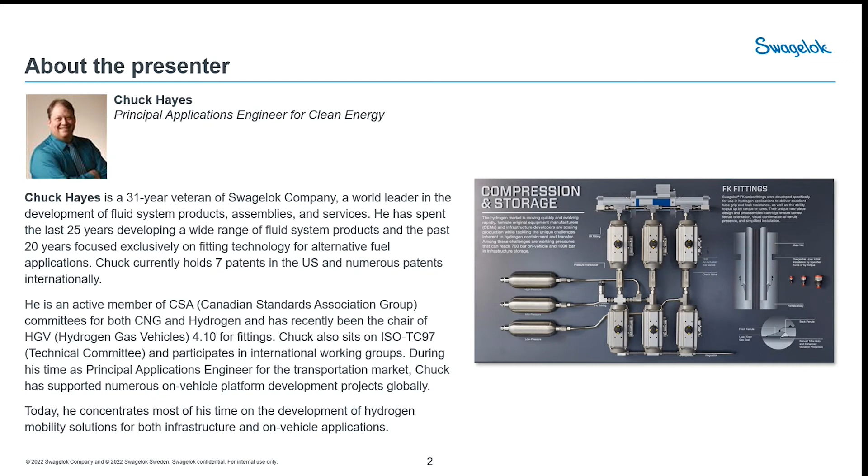Good morning. Well, good morning here in Cleveland, and good afternoon and good evening in other parts of the world. Welcome, and today we're going to be talking about some of the myths around hydrogen. We've tried to collect quite a few of them, and we're going to be talking about them and how these factors persist and the misinformation that's going out into the market.

A few of the areas we're going to look at: the safety of hydrogen, its viability as a mobility fuel, cost in both relative and real terms moving into the future, as well as its environmental impact. So today we'll be addressing each of these topics, to set the record straight on some of these different discussions, and why we believe hydrogen is the best path for the global economy moving forward, as well as a worldwide focus for helping us achieve a greener, more sustainable future, meeting the various governmental goals, including the Paris Accord and other requirements that are coming out throughout the world.

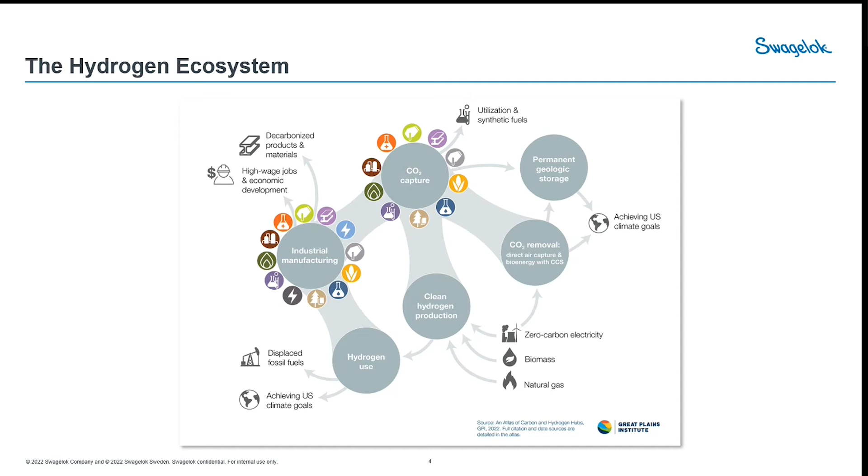There are industries that can use it in a lot of different ways, and there are a lot of different options as we move forward to help reduce carbon within our global environment. So let's start off with the first myth.

The first myth is that hydrogen gas is hazardous or dangerous - dangerous to store, dangerous to use, dangerous to move around. In all honesty, hydrogen is really no more different or more dangerous than any other flammable fuels we use, like gasoline, propane, and other oil-based fuels, as well as batteries.

I didn't include any pictures, but there are some great pictures out there of what happens with batteries. Battery electric, especially lithium batteries, burn very hot and for a very long time, so accidents with full battery vehicles can lead to pretty significant fires. There are hazards with every fuel, but how we handle them is important from an engineering standpoint.

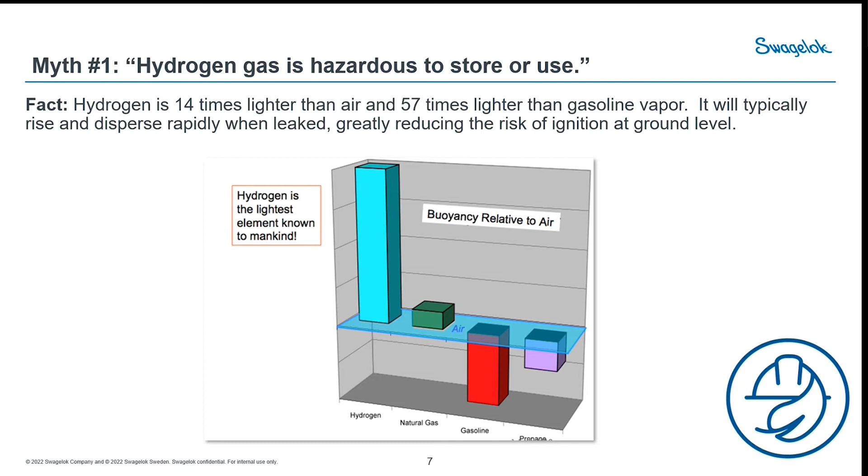However, it is a very nice feature of hydrogen that it's got such great buoyancy relative to air. Unlike what we just saw in the picture, gasoline or any other liquid fuel will just drip on the ground and cause a fire underneath whatever vehicle you have. So that's one great feature of hydrogen.

Another interesting thing about hydrogen - people worry about this because most fuels we use are actually toxic to humans. Gasoline vapors, diesel vapors, and so forth are not good for the human body. Unlike those other fuels, hydrogen is non-toxic, and if we have a hydrogen spill or leak, it will not contaminate the environment or threaten the life of humans or wildlife. Unlike other fuels, if you drop gasoline, now you've got a problem with that getting into the water - one drop or one teaspoon of gasoline can contaminate thousands of gallons of water.

As we look at other things around hydrogen, it's just its nature. The hydrogen flame is interesting - if hydrogen does catch fire, the flame is very pale blue, kind of hard to see in bright sunlight, but it's not as hot as a gasoline flame. So there's potential for less risk of secondary fires to occur. Also, hydrogen burns quickly, so the flames will burn out fairly quick.

Unlike that vehicle we saw earlier with the fire underneath it for gasoline, where there's a secondary fire and everything in that car is burning, hydrogen doesn't really do that. There are designs within hydrogen vehicles to have venting systems that vent up and away, so even if there is an ignited flame on one of those vents, it's up and away from people.

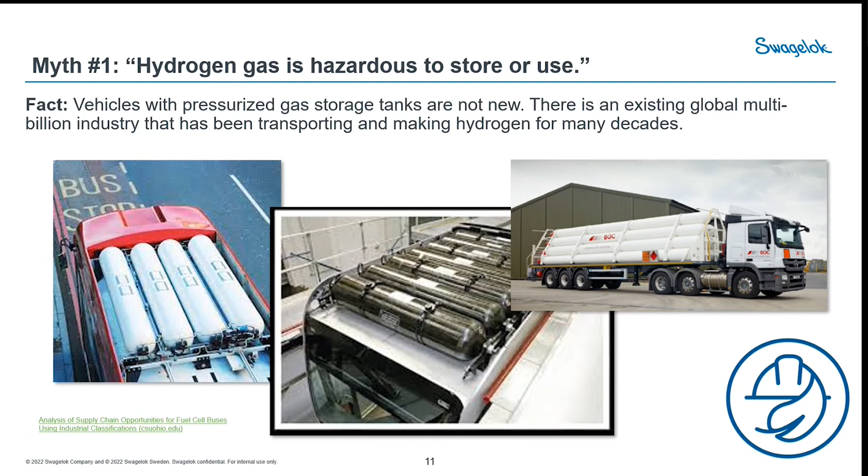Another place people don't really realize is on the dispensers - if you're going to fill up a vehicle, based on international protocols for how dispensers work, when the dispenser turns on and you hook it up to your car, the first thing it does is put a slight pressure pulse into the vehicle. That'll open up the receptacle - it's got a check valve that needs a little bit of pressure to open. It'll open up the check valves in the system, and then it does a leak check on the vehicle and a leak check on the dispenser.

So you have a high pressure gas that you're putting into a vehicle, and every single time you fuel it will do a leak check, both at the beginning. There's two different protocols: one at the beginning, one at the middle and one at the end, or just one at the beginning and one at the end. It will verify that there are no leaks within the system. Which is pretty interesting, because that means literally every single time you use it, you're going through a safety check. And obviously, there's no way with a gasoline vehicle that we're ever checking for leaks - the only way you find out is if you find the stain on your driveway.

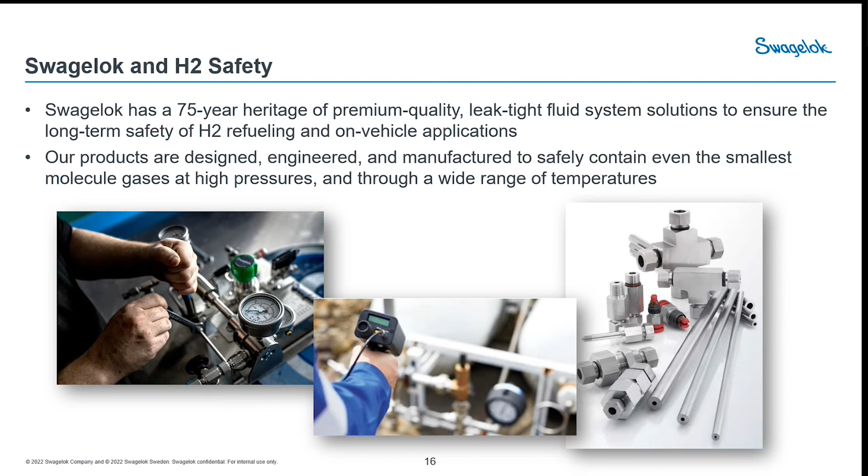So an example of one of our products, and this is a key fitting technology we have for the hydrogen industry - this is the FK fitting. It was designed back in about 2004 or 5, way back, if anyone remembers, when George Bush was president of the United States and said we were going to have a hydrogen economy. Well, it's here - it just took another 15 or 20 years to get here. But we designed this specifically for on-vehicle hydrogen performance.

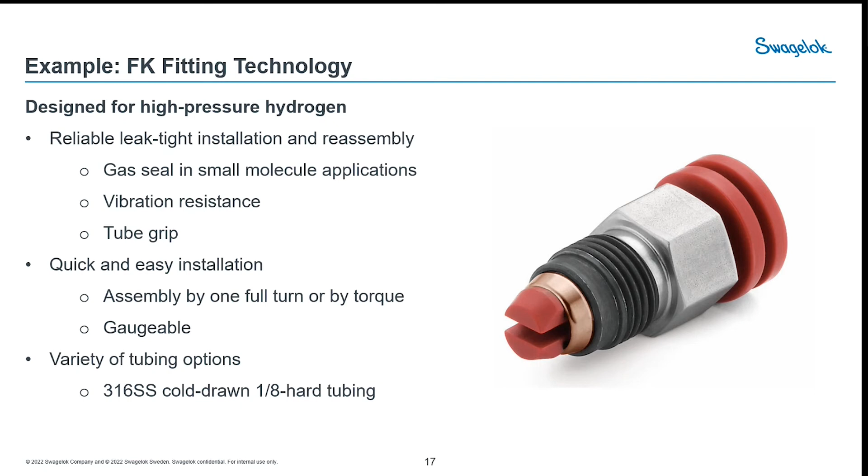It is a 2-ferrule fitting, and it follows the 75 years of Swagelok experience. Personally, I was on this design team, and this is actually one of the best fittings ever made in the world, as far as I'm concerned. It's designed to do a lot of things within hydrogen specifically, and I'll give you an example of what some of these are - just a quick cross section, we're not going to get into a lot of detail, but it's a 2-ferrule fitting.

There's a back ferrule and a front ferrule. This is a female body, so a male nut comes in behind it. But the difference between this and other 2-ferrule fittings you'll see in the market is that the front ferrule is the most important component when you deal with gas seal performance.

That front ferrule and the body have slightly different angles. So as the rear ferrule pushes forward, as you advance the nut, there's a variety of angles and radii that help force that front ferrule to do 2 things: it dives into the tubing, so it actually gets under the surface of the tubing, meaning minor scratches and imperfections on the tube do not affect gas seal performance.

That's always been a challenge in ferrules throughout the world, so we designed this one to do this. As well, we have a long, fine-finished area along the body and the front ferrule that gives us a long area to resist any kind of molecules coming through.

The back ferrule hinges and collets to hold onto that tubing, and this will actually hold 4 times the burst pressure of the tubing. This has been rated to 20,000 psi, so we can do 4 times 20,000 psi, so 80,000 psi for burst.

So sometimes there are arguments that other technologies can't possibly blow out or burst. Well, at 80,000 psi, I don't see us getting that pressure very often. This is pretty much blowout proof as well, because of the way it's designed, as long as it's installed properly. We have a gauge that will actually allow you to check and make sure it's been pulled up enough, as well as it's a makeup by torque and a makeup by turns fitting, so it meets needs from large manufacturing and other areas.

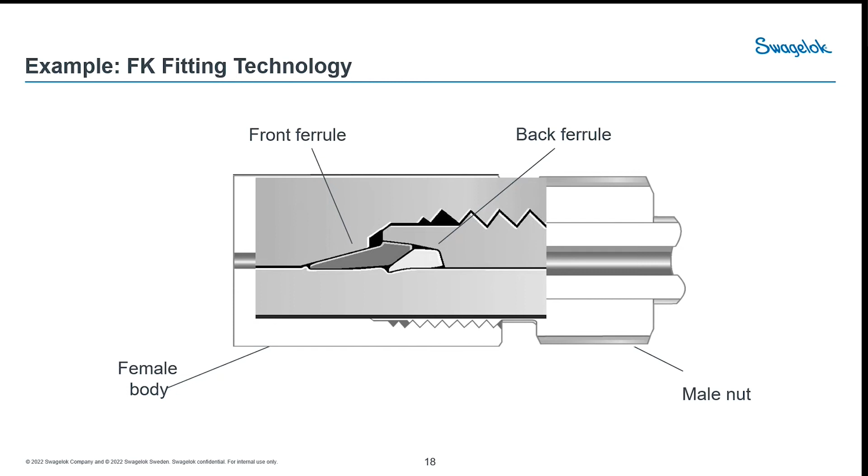All right, so let's go look at the next myth. Our next myth is hydrogen is not a practical long-range solution, something that's going to be out there for a long time around the world.

Well, there's a few things about it. Hydrogen has a very high energy density. In fact, it's the highest energy density of any of the fuels that we have out there in the world. One of the things about it is it can deliver, when we use it in, let's say, a vehicle, comparable range, if not greater range.

And when it's pressurized and stored on a vehicle, it can be distributed effectively and pretty much as easily as carbon-based fuels. So we can fuel a vehicle that would give approximately a 350-mile range with hydrogen under current conditions today, and it's being done around the world in 3 to 5 minutes, about the same as it takes to fill up with gasoline. And there are new protocols coming for heavy duty that'll fill trucks very, very quickly as well.

One thing about hydrogen, it truly is the most abundant element anywhere in the universe. But here on Earth, H2 does not exist in its own form. Hydrogen is always tied up with something else. Of course, our classic example is water, H2O, and other organic compounds, so there are lots of different places. Hydrogen is part of methane, methane is CH4. So if you can break the hydrogen off of whatever it's connected to, you can end up with pure hydrogen.

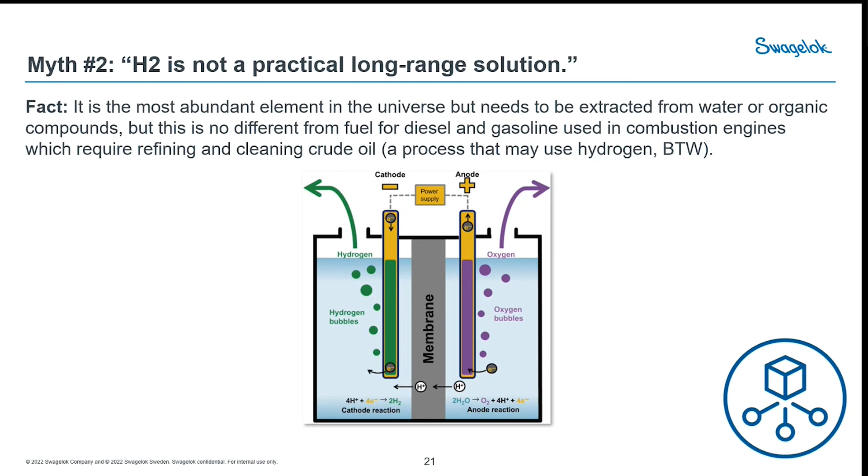Now, one interesting thing is that other fuels, like gasoline and diesel fuel, all have to be refined from oil as well, whether that be any other source of liquid fuel, it's still refined as well. So we end up having that while there is a treatment that has to be done to make the fuel usable or make hydrogen usable, there's also a treatment needed for every other form of energy that we have.

There are major sources of hydrogen today. The primary way that we make hydrogen today is a process called steam methane reforming. So we take natural gas, we knock the carbon off of it, and you end up with hydrogen. It's a multi-billion-dollar industry around the world. Generally, these places, if you see a steam methane reforming plant, it's going to look like a small power plant. They're large, they're industrial, but those are starting to come down in scale, and they're getting smaller.

There's companies that are making smaller scale reformers that can go right at a gas station, about the size of a shipping container. Sit in the back of the gas station and make hydrogen all day long from natural gas. The reason that's an attractive option at this moment in time is that, like in the United States, we've got millions of miles of natural gas lines running around that we can grab natural gas easily. So that's one way to make hydrogen.

And then, of course, there's other sources of renewable energy. So right now, solar, wind, biogas, and other fuels can be used to generate electricity for electrolysis. Electrolysis is truly the clean way, and ultimately, we'll talk about that as green hydrogen. We'll look at that a little bit later too. But we're going to go ahead and separate oxygen and hydrogen.

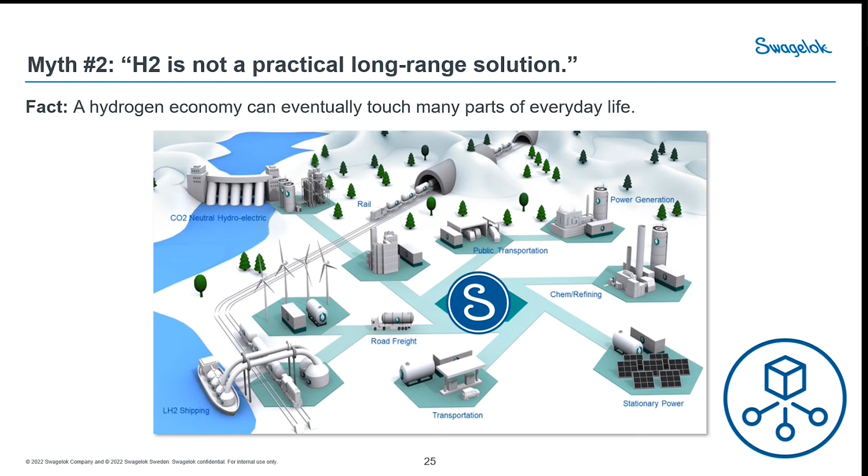So finally, just to recap, some of the long-range solutions: because of hydrogen's high energy density, it's particularly well suited for heavy-duty vehicle applications. It's lightweight and can be used to maximize the truck's payloads over batteries, dramatically increasing their range.

High-speed refueling, I mentioned this a little earlier. There's an industry consortium working on very high flow, high speed refueling for trucks, so that a truck could put on enough hydrogen to go between 700 and 1,000 miles in less than 10 minutes. That really allows you to reduce downtime for fleets. If you think about it, that would mean getting across the entire United States would take no more than three fills, so 30 minutes of fueling time, which is very low.

If you were trying to do that with battery power on a truck, it could be 9 hours per charge. So that doesn't work really well.

And then finally, that whole part about the lift trucks. Lift trucks are filling in 2 to 3 minutes, and then running a shift or two within a warehouse. You don't get the fumes that you get from propane, and you don't have the problems with big heavy batteries and leaks and all the other problems that happen there.

So even though green hydrogen depends on wind and solar power for generation, as we improve storage technologies and create new ways to store hydrogen, it helps keep the energy flowing regardless of the weather. Having fuel cells on site, you can store the extra energy when the sun shines and use it again when it gets cloudy outside.

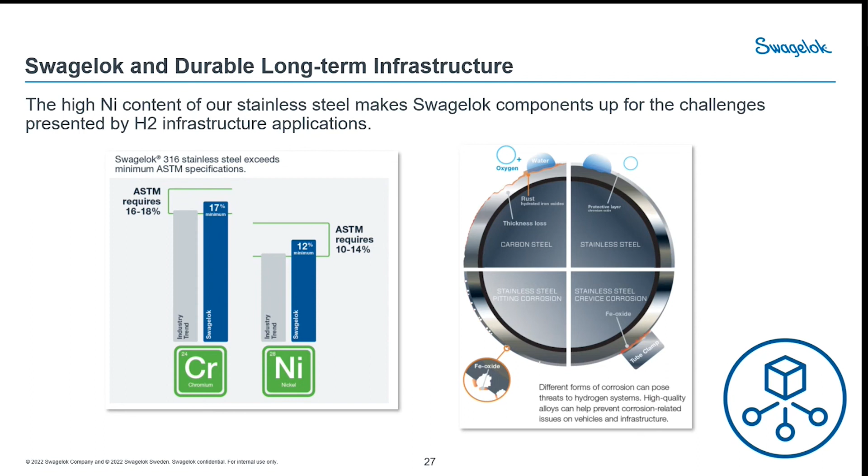But the processes for developing hydrogen take equipment and different things in different places. The more we have, just like all economics, the cheaper it'll start getting. So there are ways we're dealing with this. One thing the government is doing is helping push some programs together, because it's really hard for private industry to go ahead and do all the investment necessary.

Right now, what the U.S. has done - this is the Department of Energy - they call these things Earthshots. This comes from the concept of JFK's 'we're going to go to the moon in a decade,' that whole challenge given in the '60s. There are a few different Earthshots for hydrogen. This particular one is $1 US dollar for 1 kilogram of hydrogen in 1 decade - so in 10 years, getting the price of hydrogen down to $1. That will be a game changer for hydrogen in the industry.

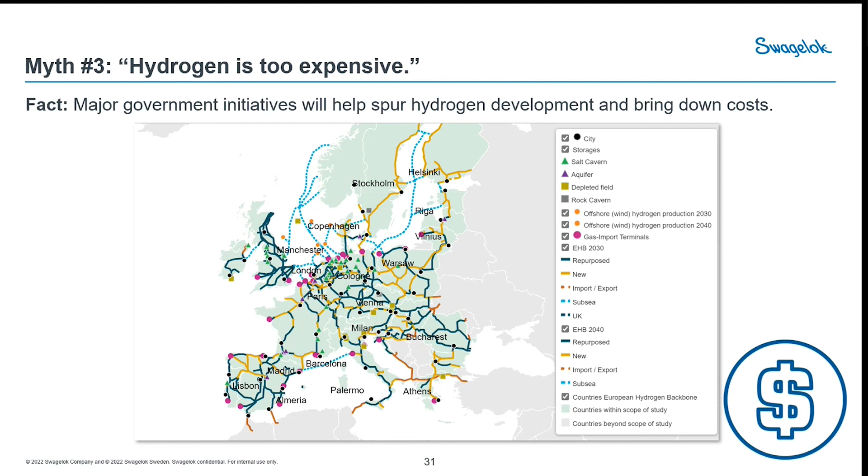As we mentioned earlier, the cost and efficiency of renewable solar, wind, and water energy sources are continuing to improve, and this will carry H2 fuel costs with it. We're going to have some problems with solar for a while, as a lot of the solar panels are stuck in China right now due to COVID, so it's going to take about a year for that industry to recover dramatically. But there are plans in place to put in large solar arrays to do electrolysis and green hydrogen around the country and around the world.

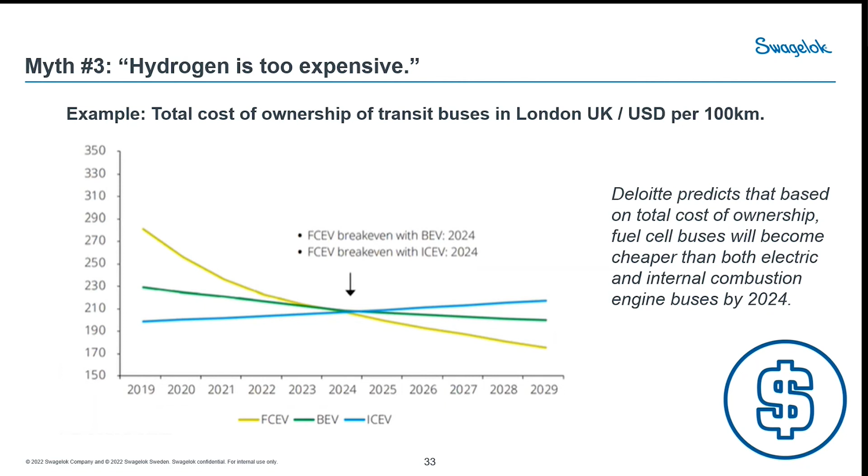Taking a station offline is interesting - you talk to hydrogen users in California in particular, and as soon as a station goes offline, Facebook blows up and says that station's closed. So it's bad for reputation, and it's bad for the industry to go into unexpected maintenance. High quality components can help reduce those surprises and keep those stations up and running for long periods of time, and not disrupt the supply of hydrogen to customers.

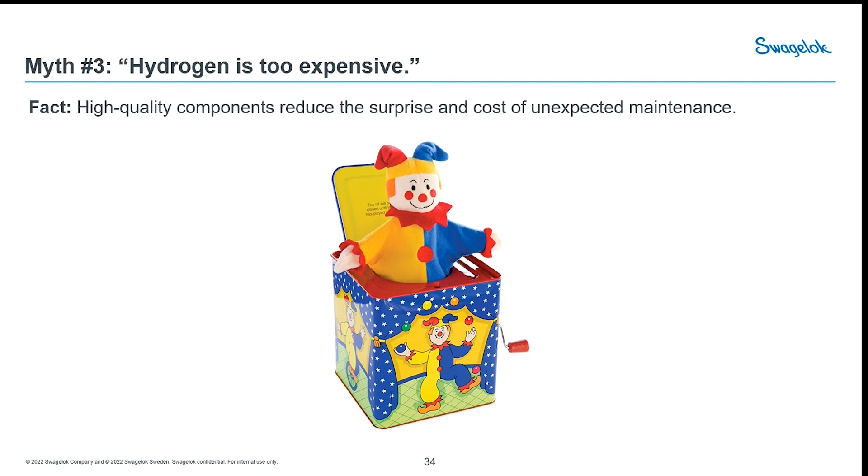We mentioned before, government support will help accelerate the growth of hydrogen at scale. In the U.S., one of the big plans is to go to hub and spoke - we're going to build centers of large hydrogen production that will then supply areas around them within the country for that hydrogen, and the government's helping support a lot of those programs now.

The price of green hydrogen continues to fall compared to the other mobility fuels, and it's projected to be cheaper than natural gas by 2050. These numbers and statements may only be 3 months old, but they're still dated due to what's happening in the world economy today. We'll see how that goes, and I think hydrogen gets more and more attractive as we go, as the cost and efficiency of solar, wind, and water power really helps reduce the H2 costs as we move forward.

So how does Swagelok help with this total cost of ownership? Well, the key to lowering cost is scalability and increased infrastructure. We can help with this through products, solutions and services.

Swagelok total cost of ownership, and this is one of the value statements we talk about all the time for refueling infrastructure, includes reduced installation time, ease of maintenance, long service life with corrosion resistance and embrittlement protection, and standard solutions for global support.

We have solutions engineers that can help design systems that are both efficient and easy to maintain, and can be delivered as a package. So a portion of a system can be delivered with one part number coming directly from Swagelok, assembled, making it easier to install and have standardization in facilities around the world.

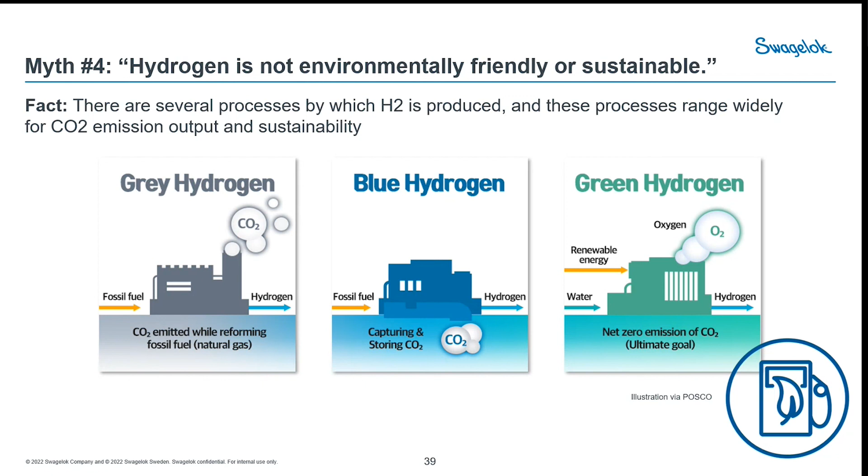The other two, gray and blue, are out there in the world, and that's predominantly where we're getting our fuels from right now. But the goal is to really move towards green, both in North America and in Europe, as well as Asia. I mentioned earlier about carbon capture and permanent storage for industrial uses.

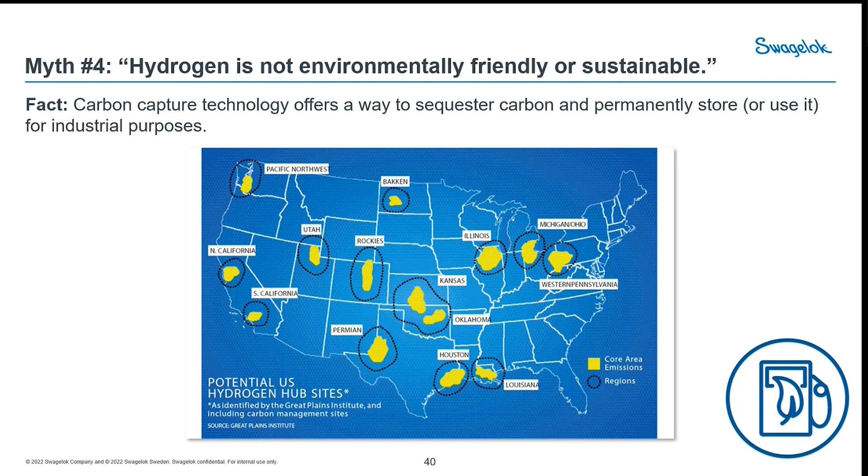They also sit along major freight routes within the U.S. So these are being targeted areas to do both hydrogen development for fuel and carbon capture for both industry and hydrogen, to be able to capture that carbon and start reducing the amount of carbon going up into the atmosphere.

Another thing is we talked about those Earth shots earlier. There's a few other ones going out right now, and the first one came out in June of last year, for clean energy, reducing the cost by 80%, getting that $1 per kilogram. There's another one, long duration storage, which aims to have affordable grid storage for clean power, meaning we start storing up to 10 hours of power on our grid.

Right now in the United States we do not. There's very, very low storage for electric. We store about 60 to 80% of our fossil fuels someplace, whether in salt domes, refineries, pipelines, or in your car at gas stations. There's a lot of storage of fuel. Electricity, we store very little. I think it's 0.00063, the last number I heard, of electric power stored, and that number keeps going up because we keep having more cell phones and we store power on the batteries.

But large scale storage of electricity doesn't really exist. One of the goals is to get there. One way to do that is with hydrogen. There's been talk about using megawatt scale batteries for cities for backup. The only problem is a megawatt of batteries would take about a city block square building, 4 stories tall, to be able to store that much energy. So that doesn't seem really viable, with lots and lots of batteries going inside of it.

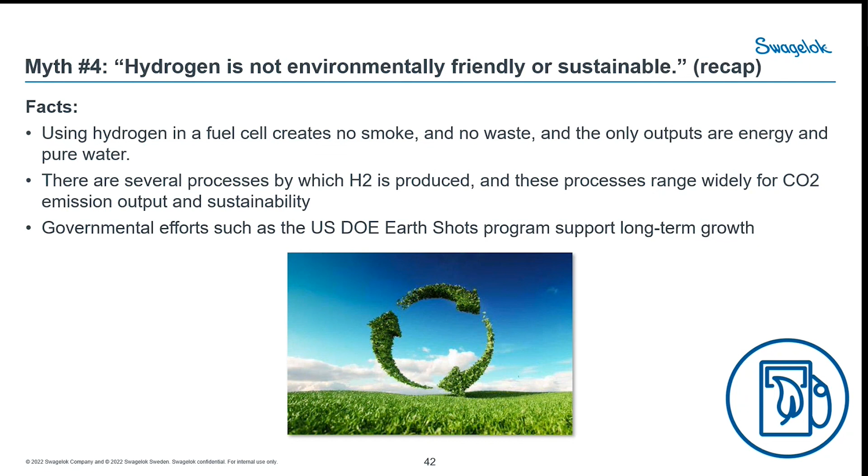So we talk about Swagelok and clean energy. This is our 75th anniversary, so we're celebrating that this month and next month. We've had 75 years of experience and expertise in containment and management of small molecule gases under pressures, under medium to high pressures, which is where this entire industry lives.

For the last 30 years, we've been working directly within the clean energy groups, working with natural gas. Natural gas on vehicles has evolved into hydrogen on vehicles, so many of the same players are playing in that market. The things we learned from natural gas are helping accelerate hydrogen development, stations, vehicle development, and so forth. But hydrogen is dramatically smaller than natural gas as a molecule size.

Our stainless steel components deliver leak tight systems and long service life due to our designs and materials. And we have a global network of authorized sales and service centers, experts around the world in Swagelok product and in the industries, there whenever and wherever needed to help support the industry. As a result, we are uniquely qualified to help customers meet and overcome fluid system challenges unique to this clean energy industry.